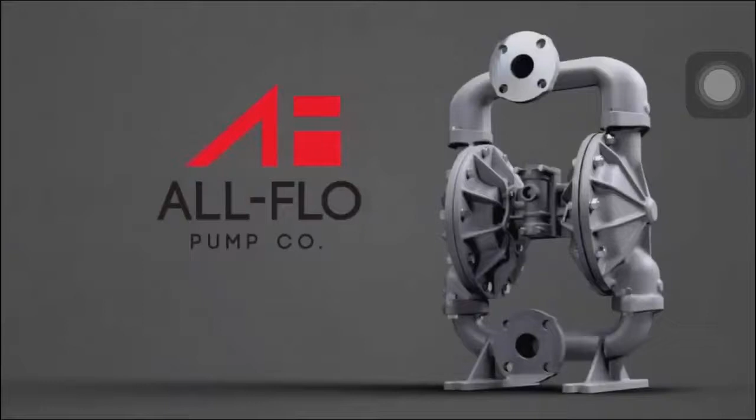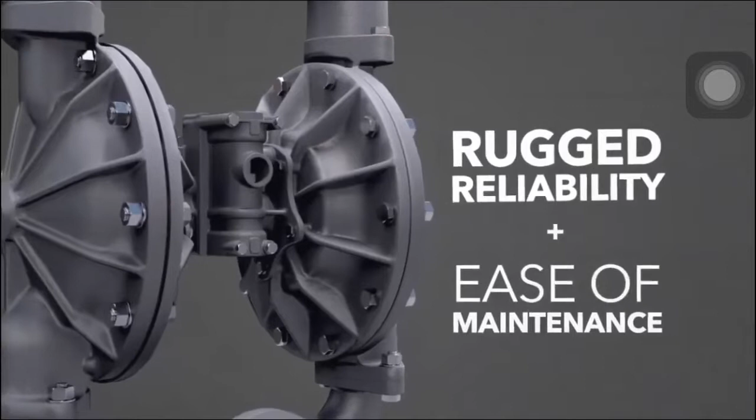The All-Flo A200, the most energy-efficient, 2-inch air-operated diaphragm pump in the world. With a smart, simple design perfected during years of intensive research, the A200 combines rugged reliability and ease of maintenance to deliver the best performance on the market today.

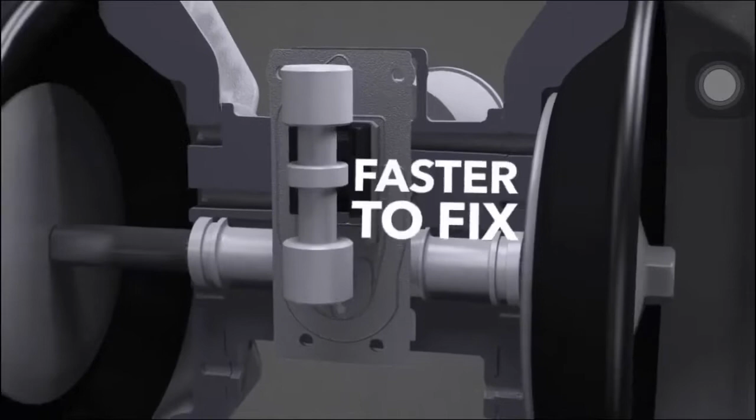The A200 is engineered to outperform the competition while using the fewest number of air valve parts in the industry. In fact, during operation, only 4 pieces of the air valve move. This makes the A200 easier to maintain, faster to fix if there's a problem, and less expensive to operate overall.

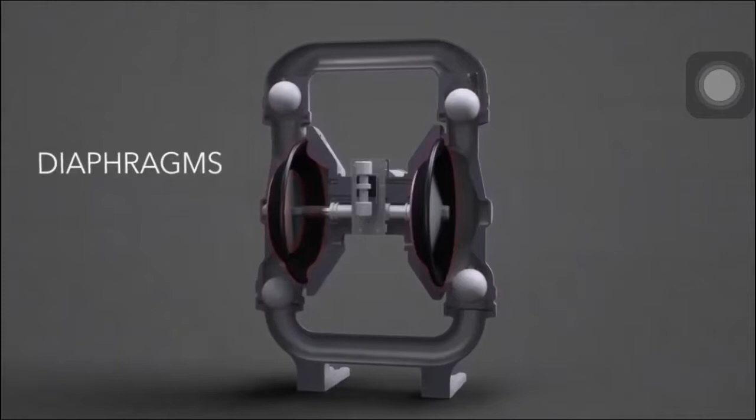Here's a look at what makes the A200 tick: check valves, diaphragms, the diaphragm rod assembly, the main air valve, and the pilot air valve. Now that you know the key components of the A200, we can discuss how it works.

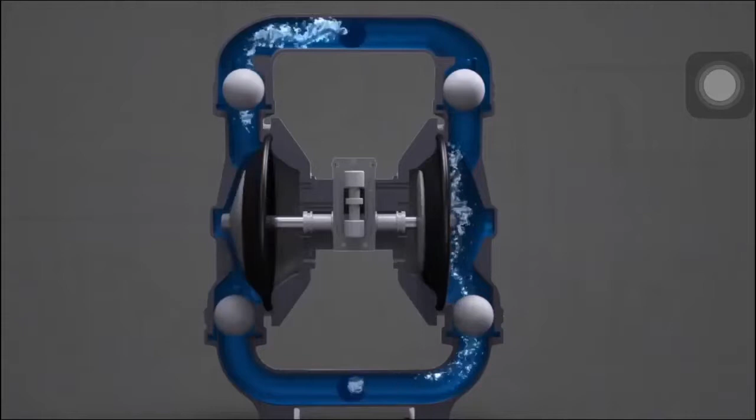2 diaphragms, connected by the diaphragm rod, work in unison to create the liquid motion of the pump. While one side is in suction mode, the other is in discharge mode. As a diaphragm moves inward, it creates suction. This suction motion causes the balls to move towards each other.

As this happens, the top valve closes and the bottom valve opens. This allows liquid to enter the chamber through the bottom port.

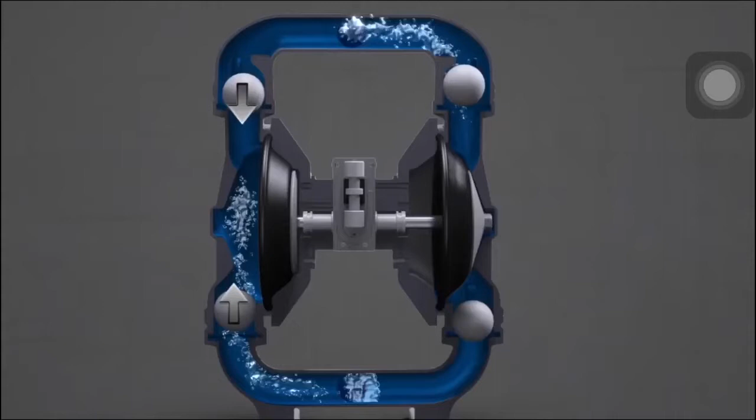As a diaphragm moves outward, the discharge motion causes the balls to move away from each other. As this happens, the top valve opens and the bottom valve closes. This allows liquid to exit the chambers and discharge through the top port.

This process constantly alternates between the 2 chambers to create a continuous cycle.

The pump diaphragms are driven by pressurized air that is directed left and right by the movement of the main air valve. Here's how it works. When air pressure is applied to the pump, the main air valve moves up and down.

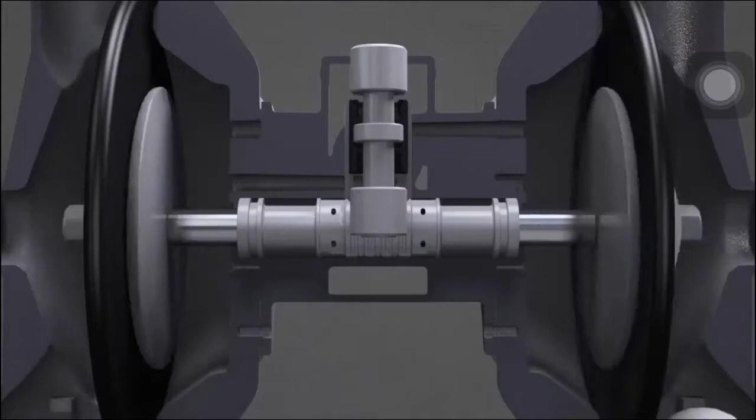When the main air valve is in the down position, air pressure is diverted to the right diaphragm. At the same time, exhaust air from the left diaphragm passes through the shuttle and shuttle plate and exits the rear of the pump.

When the main air valve is in the up position, air pressure is diverted to the left diaphragm, while the right diaphragm is exhausted. This process constantly alternates between the up and down position to create a continuous cycle.

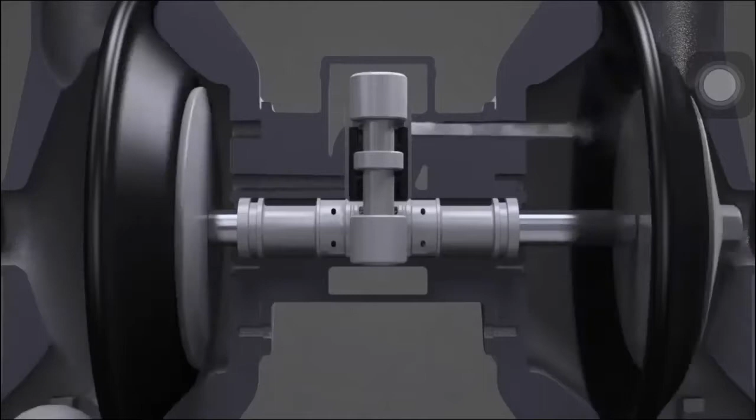The pilot air valve directs the air that moves the main air valve. It is constructed of 5 separate chambers and a central rod that moves side to side due to the diaphragm pressurizations.

The pilot and main air valves work together to drive the pump. The pilot air valve has 2 logical states, which we will call left and right. Pressurized air enters chamber 3 in the middle of the pilot valve sleeve. Chamber 3 is always under pressure.

When the pilot air valve travels far enough to the right, chambers 3 and 4 are connected. This allows the pressurized air from chamber 3 to pass through and exit chamber 4, which moves the main air valve upward. This causes the left diaphragm to pressurize and the pilot valve to begin moving left.

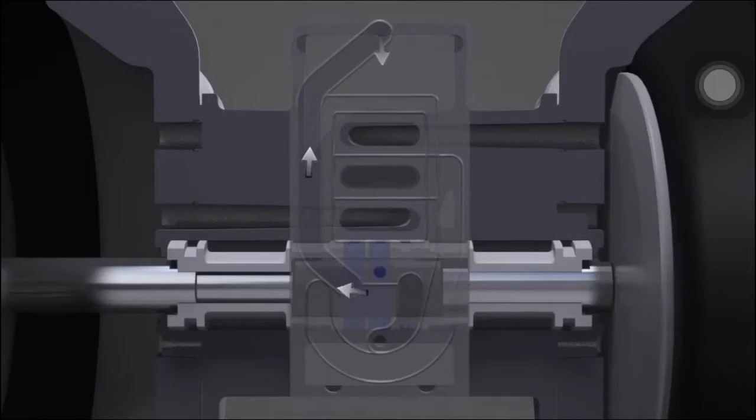When the pilot air valve travels far enough to the left, chamber 3 connects to chamber 2 and the air moves the main air valve downward. This causes the right diaphragm to pressurize and the pilot valve to begin moving right.

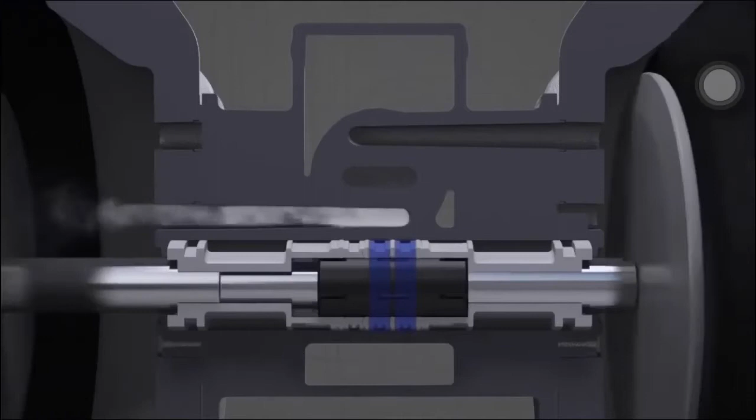Throughout the cycle, one side pressurizes as the other exhausts. This process constantly alternates between the pilot and main air valve to create a continuous cycle.

The simple, straightforward design of the All-Flo A200 allows the air and liquid ends to work together reliably to transfer your process fluid in the most efficient manner possible.